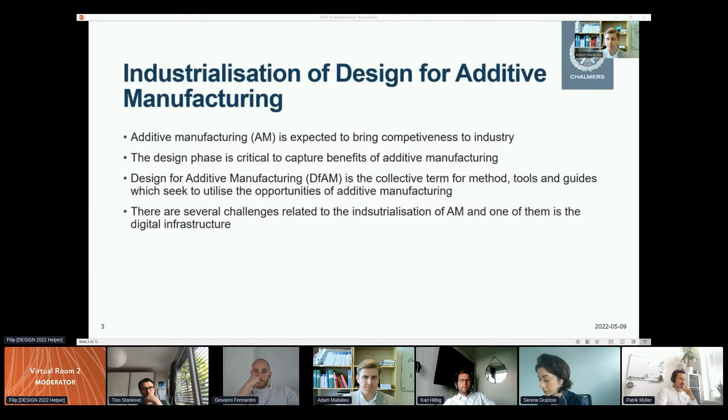The process of DFAM is in particular considered to be digitally intense. For clarification of what is meant by digital infrastructure, we define it as what comprises the information technologies used together to process the vast amount of data that is being generated, transferred, stored, and traced in the AM process steps.

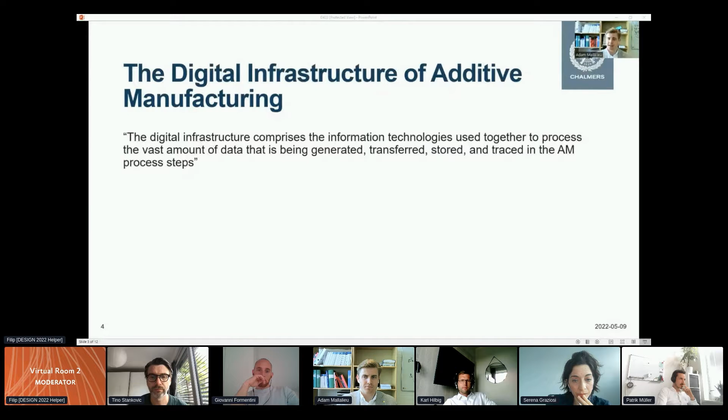The following aim and scope was formulated: to review how DFAM methods and tools consider the digital infrastructure and identify a potential gap in literature, and to explore how the digital infrastructure affects the industrialization of AM. From these, two research questions were formulated.

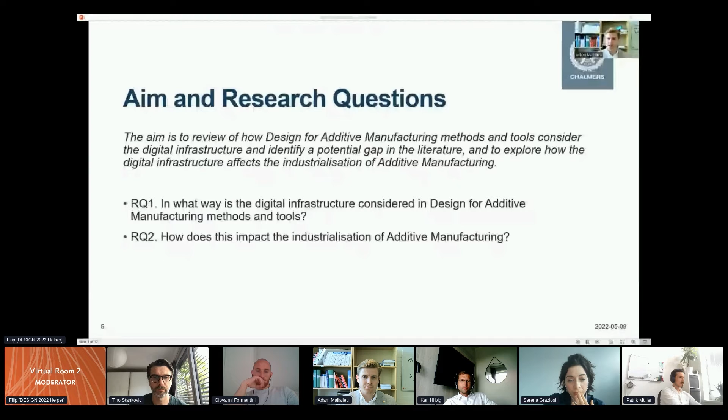First, in what way is the digital infrastructure considered in DFAM methods and tools, along with how does this then impact industrialization of AM?

The study consisted of two parts: a systematic literature review aiming to address RQ1, along with an industrial use case with the intention to address RQ2.

Five categories were used to highlight how the digital infrastructure is considered in the literature.

The first one is data format incompatibility. Methods and tools typically make use of different software, which results in a wide variety of data formats. It can become troublesome if the compatibility between the different formats in the methods and tools is not considered. 12 of the authors either considered the format used in their own specific DFAM method or tool, or problematized it.

The second one is information management. It is interpreted as the activity of managing information, including transferring, storing, tracing, and retrieving information. The implementation of information management in DFAM methods and tools was only considered in 9 of the reviewed articles.

The third one is data analysis, and it relates to the set of activities needed to understand and interpret data. This could also include what is often referred to as cleaning data. The need for cleaning or processing data generated by DFAM methods and tools was seemingly neglected and was only mentioned by 7 authors in the reviewed literature.

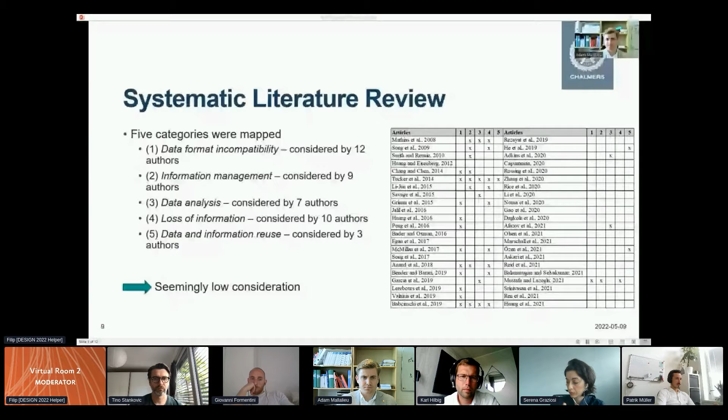Following the systematic literature review, an industrial use case was conducted together with a large OEM of construction equipment. The company seeks to investigate the potential of AM as an option to produce production tools used by operators on the assembly line. AM is particularly considered an interesting option, since these tools are often produced in low volume and customized for operators.

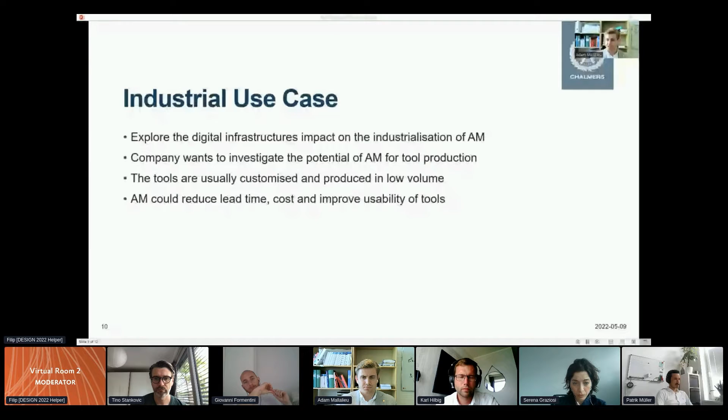AM could then potentially reduce the lead time and cost of these tools. There is also an expectation that AM can increase the usability of the tools if, for example, more ergonomic designs can be produced. The purpose of the industrial use case, in relation to this paper and study, was more to explore how the digital infrastructure can impact the industrialization of AM.

The issue of data format compatibility was observed in the case study. The output format from Fusion 360 is STL, and this format cannot be used to change the geometry in the CAD software. The output of the generated design instead had to be manually implemented on the original CAD file.

Data analysis was needed in the case study, since some of the generated data or information had to be processed before entering the next step. The output from the generated design was not only delivered in a non-compatible format, but it also required manual cleaning to ensure that the proposed design could be printed.

Loss of information was also observed in the case study. The optimized design had to be translated into general guidance for the design. This resulted in information loss, since some aspects of the optimized geometry were not possible to replicate.

There were some identified possibilities for data and information reuse in the case study. An example of this was the produced print data.

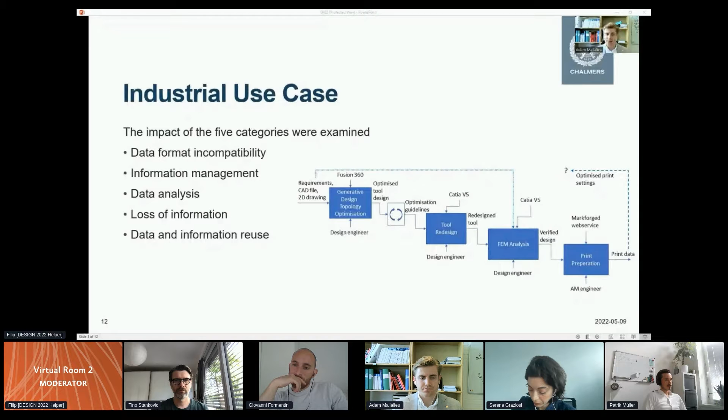Relating back to the aim of this paper, which was to review how the design for additive manufacturing methods and tools consider the digital infrastructure and identify potential gaps in the literature, and to explore how the digital infrastructure affects the industrialization of additive manufacturing. We can conclude that there is a low consideration in the reviewed literature, indicating a gap. In turn, this can have a negative impact on the industrialization of AM as well.

We therefore recommend that there should be more consideration of the issues raised in this paper when developing and validating DFAM methods and tools. We also believe that the digital infrastructure needs to be studied further to strengthen our arguments.

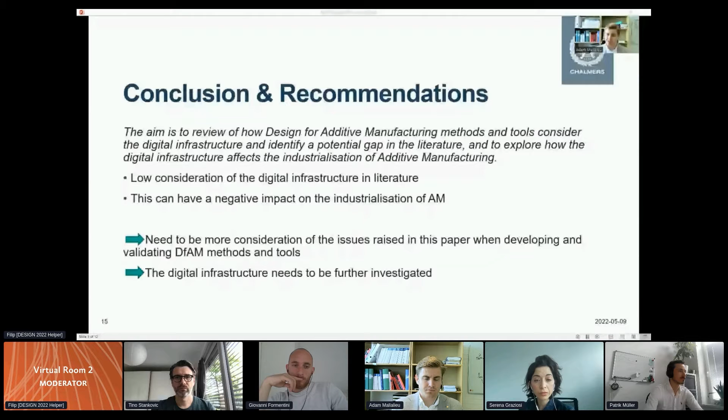Good morning, everybody. I'm Giovanni Formentini, and today I'm going to present our work entitled A Framework to Collect and Reuse Engineering Knowledge in the Context of Design for Additive Manufacturing. During the presentation, we'll see the research context, the state of the art, what we have done, the case study, and conclusions.

The research context in which we're working is the development of additive manufacturing technologies. Additive manufacturing is a fast developing technology, but right now there is a lack of tools to collect knowledge in order to avoid manufacturing issues during the product design. So our goal is to create a framework to collect design actions for design for additive manufacturing technologies, based on ontology, in order to consider and anticipate manufacturing issues during the product design, and also to consider and select the best printing direction according to the requirements.

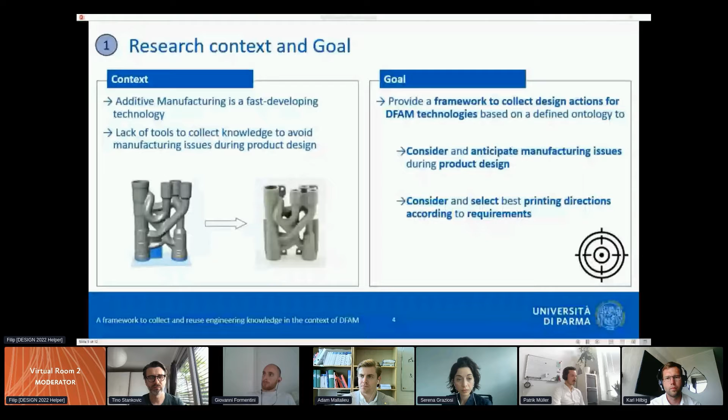Currently, in literature, there are some sources in which it's possible to get information for designing for additive manufacturing. However, this information is limited and not structured. Moreover, the knowledge frameworks developed for other technologies cannot be used for additive manufacturing technologies. Finally, there are some preliminary models to formalize additive manufacturing knowledge, but these models lack manufacturing problem consideration. So what is missing right now is a framework able to collect design actions that can be applied during product development and can anticipate manufacturing problems, considering also the printing directions.

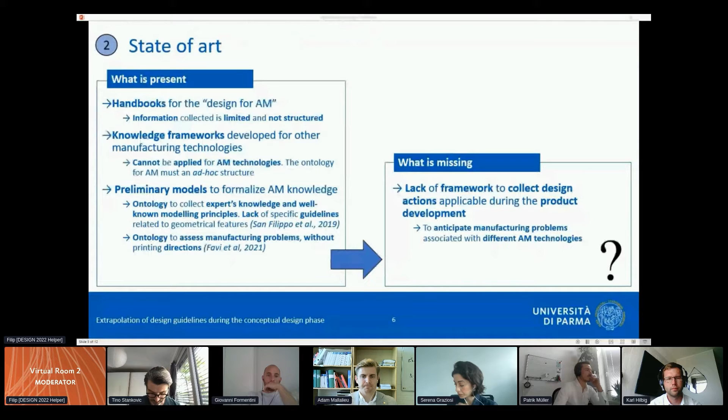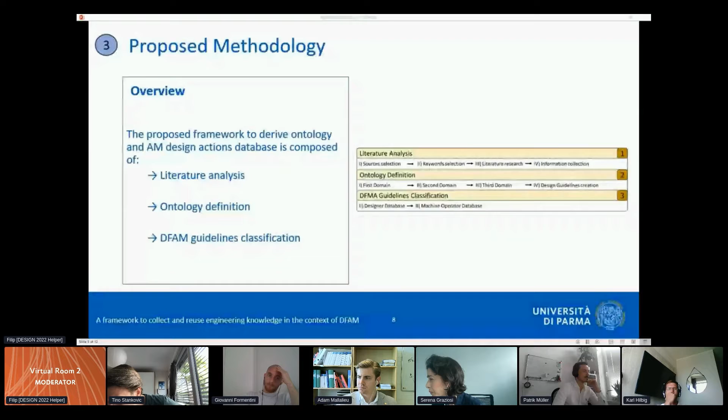The method that we are proposing is composed of 3 steps. The first one is a literature analysis, then there is an ontology definition, and finally the design for additive manufacturing guidelines classification. The first step, the literature analysis, was performed by looking at information inside sources like books, scientific databases, company databases, and so on. The research was performed using a keyword approach, with keywords such as design rules, design limitation, design expertise, and also synonyms. Moreover, to further widen the research, we did brainstorming sessions with experts in the field of additive manufacturing in order to collect their knowledge.

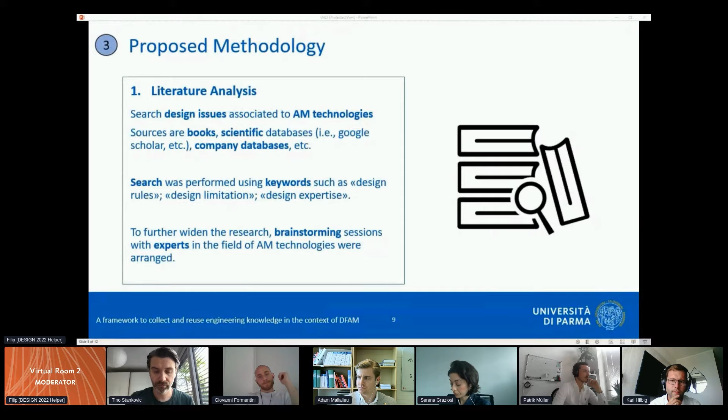The second step is the definition of the ontology. When designing a product that has to be manufactured with additive manufacturing technologies, several parameters must be considered. For instance, the technology that is used, the material, and even the feature that must be created need to be considered by designers in order to anticipate manufacturing problems. Following this, we created an ontology based on 3 domains.

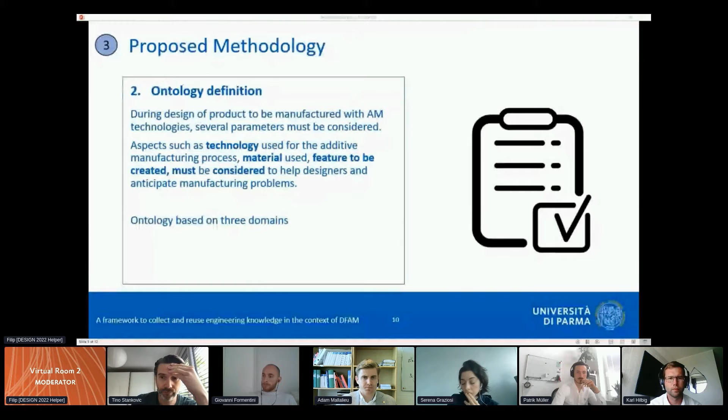The first domain, called domain 1, describes the geometric features such as holes, walls, surfaces, and so on. The second domain, called domain 2, considers the classification of additive manufacturing technologies. This classification has been done based on a funnel of 4 elements. The final domain, domain 3, considers the material that has to be used. In particular, we developed the ontology for materials such as plastics and metals.

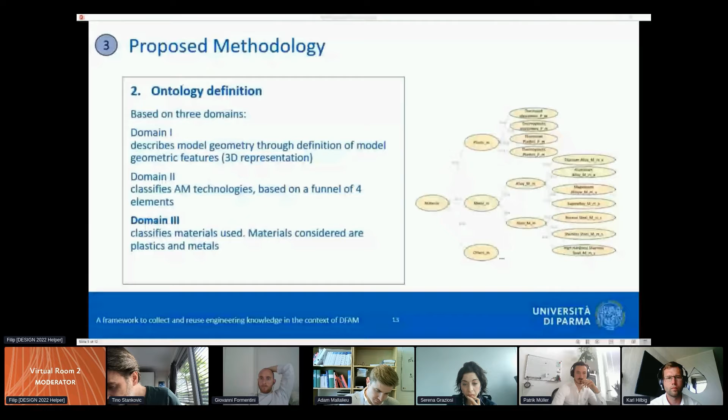The ontology, moreover, defines a clear structure in order to build design guidelines. The structure of a design guideline must follow the form of verb plus noun and also must have a mathematical threshold associated with it. The threshold is used to understand if the design guideline is respected by features or not. We have three different types of errors. The first one is an information error.

It means that the design guideline is not respected, but this won't impact the manufacturing properties of the product. The second one is a warning. It means that the manufacturing process can still be done, but the cost and the time of the process are increased. Finally, we have a critical error, which means that the manufacturing process will fail if the feature isn't fixed.

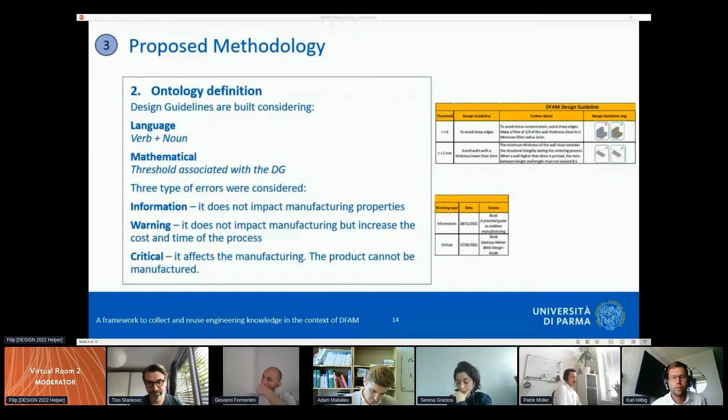The final step is the classification of design guidelines, and during the classification, the design guidelines were clustered into two databases. In particular, one is called Additive Manufacturing Design Database, and it collects design guidelines to be considered during the product design, while the other one is the Additive Manufacturing Machine Operator Database, and it collects design guidelines to be considered during the manufacturing process.

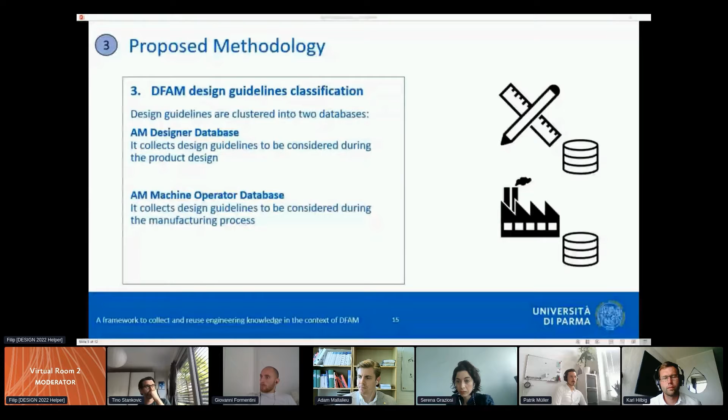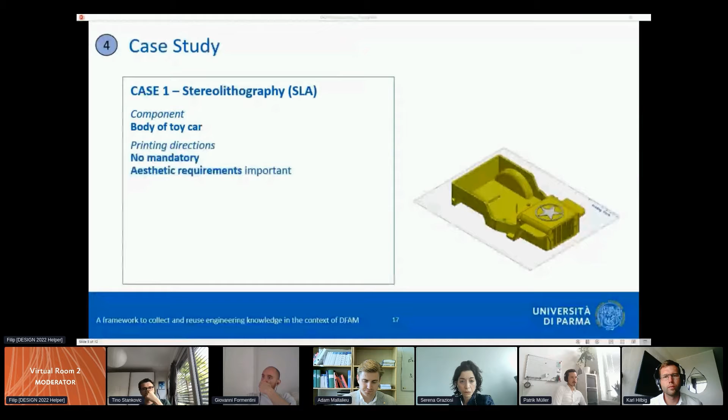The proposed method has been applied to two different case studies. The first one is the stereolithography additive manufacturing technology, and the component which we analyzed was the body of a toy car. In this specific case, the printing directions are not mandatory, and the most important feature to respect is the aesthetic requirements. Using the machine operator database, it was possible to identify the best printing direction in order to maximize the aesthetic requirement. In this case, the printing direction is the one shown on the right hand of the slide.

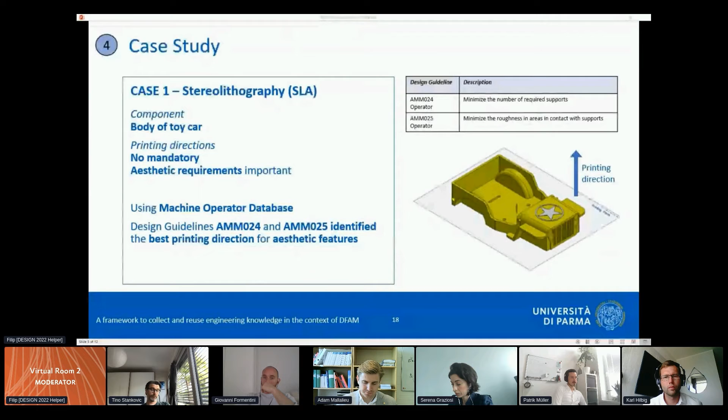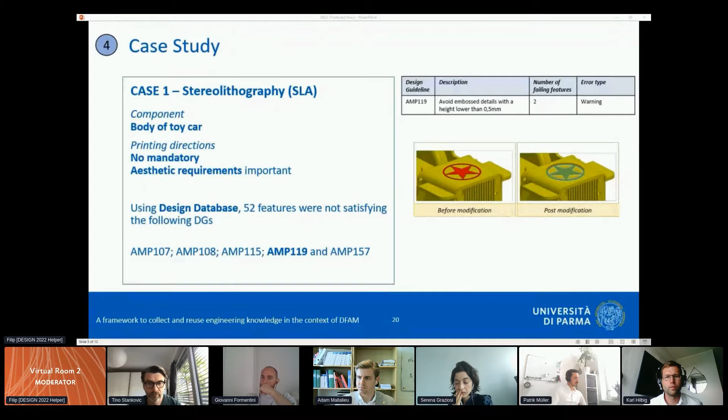Then, using the design database, it was possible to see that 52 features were not satisfying the following design guidelines that you can see on the right side. Due to the time constraint, we're going to show you just one design guideline, which is the AMP 119, which is suggesting to avoid embossed detail with a height lower than 0.5 millimeters. As you can see on the picture, before the modification, the feature was in error. Then we modified that, increasing the height, and everything was fine.

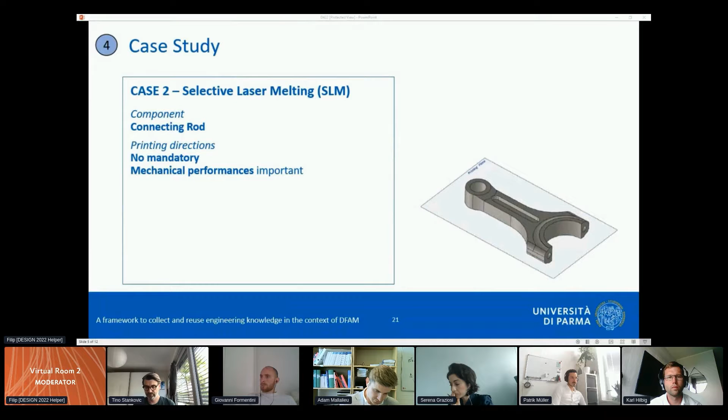The second case study is a connecting rod. In this case, we do not have a mandatory printing direction as well. And the most important characteristics are the mechanical performances. Using the machine operator database, it was possible to identify the best printing direction in order to maximize the mechanical performances. And then, using the design database, it was possible to see that 26 features were not satisfying the following design guidelines, the one that you see here.

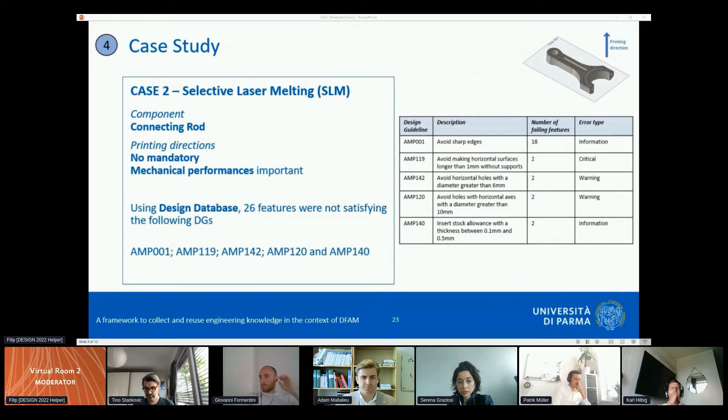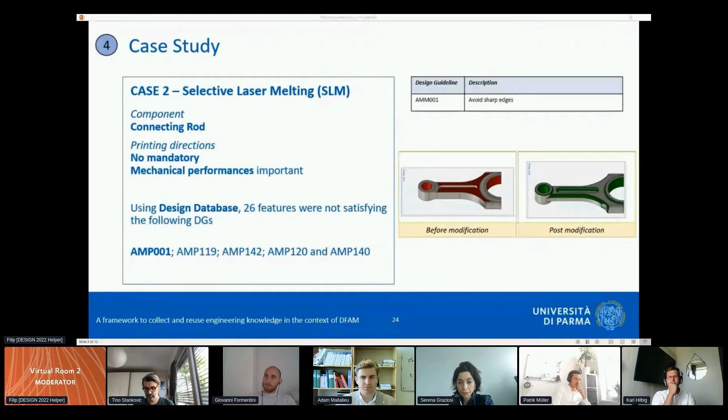For example, the design guideline AMM001 is suggesting to avoid sharp edges. And as you can see on the right side, we have the before modification representation and the post modification representation.

In conclusion, the ontology and the framework that we propose help designers to spot errors during the design process. However, it's difficult to abstract design guidelines and translate them according to the developed ontology. Moreover, additive manufacturing knowledge is still limited and continuously evolving, so there is a need for constant updates. Future development will focus on increasing the database and also on automating the retrieval of CAD features to reduce the analysis time.

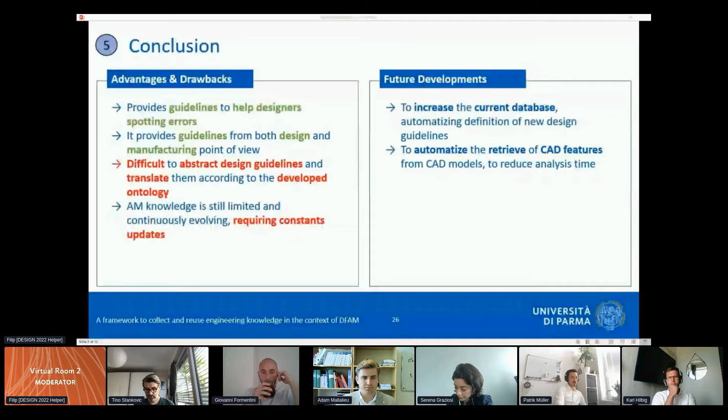Good afternoon. My name is Tino Stanković. I'm a senior scientist at the Engineering Design and Computing Laboratory at ETH Zurich, Switzerland, and I'm going to present our work on computational design of an additively manufactured origami-based hand orthosis. I would like to start off by presenting the motivation for our work.

In recent years, a significant number of new additively manufactured hand orthosis designs have been reported. Those designs, in comparison to the conventional casts, are lightweight, better ventilated, can be easily removed, and don't have excessive pressure points. So there are many advantages. However, there are also disadvantages. They have to be post-processed to remove sharp edges, for example, and to remove the support structures.

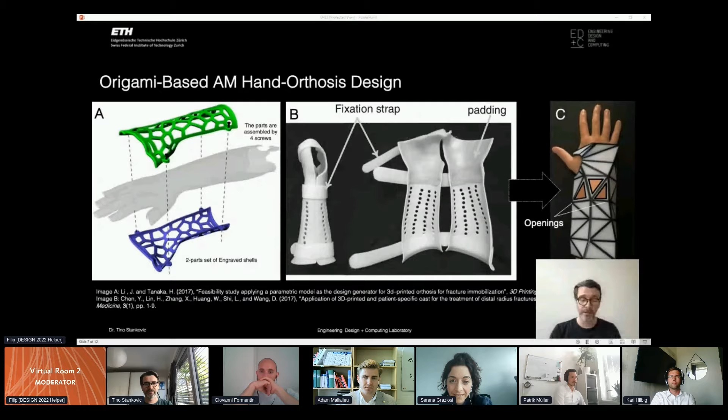And our motivation comes from these drawbacks, in which we try to design an origami-based hand orthosis that can be produced flat and then folded to a person's arm. The openings can be easily added, and some other features of origami patterns that I'm going to discuss in future slides can be beneficial to realize such a design.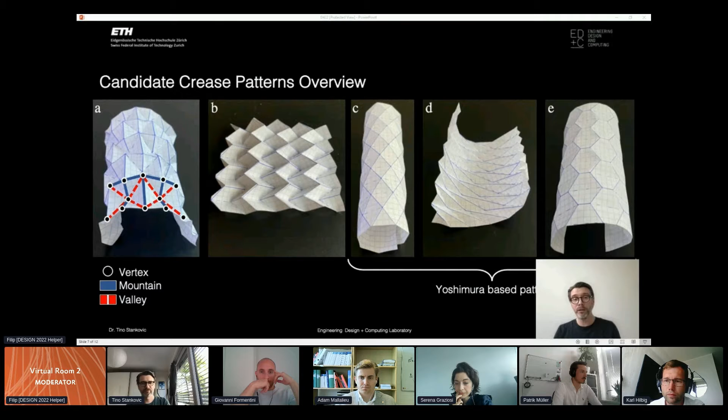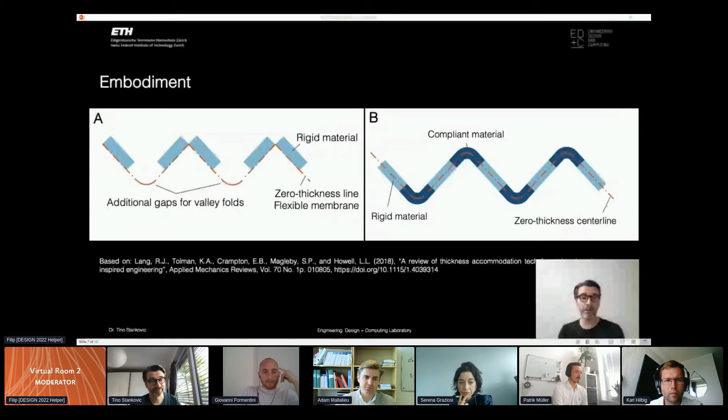So we go for more degrees of freedom, which will allow us to explore the design space more. With respect to the embodiment, we decided between 2 different strategies. A shows a strategy in which rigid material is connected by a flexible membrane, whereas B shows rigid material being connected by compliant or flexible material. B is beneficial for our case because A introduced a reduction in stiffness due to the gaps between the rigid material. So we decided to embody our design using B.

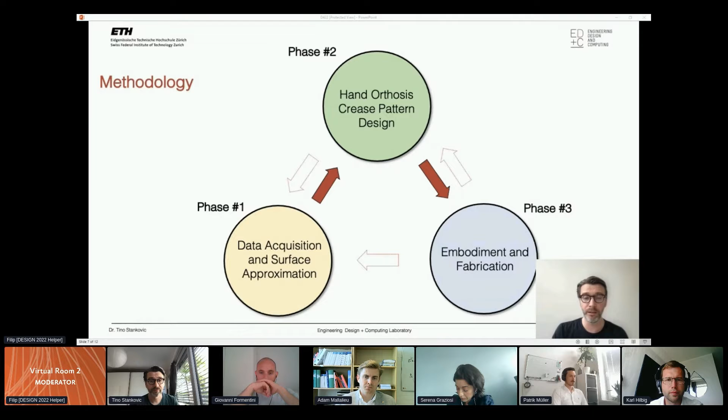The methodology that we developed for our work involves 3 phases: data acquisition and surface approximation, hand orthosis crease pattern design, and embodiment and fabrication. Of course, since we needed to set the parameter settings and find the design heuristics, we iterated between the phases and not only discovered designs, but also tried to pinpoint design parameters and relevant design heuristics required to produce such designs. Let's describe the phases in brief.

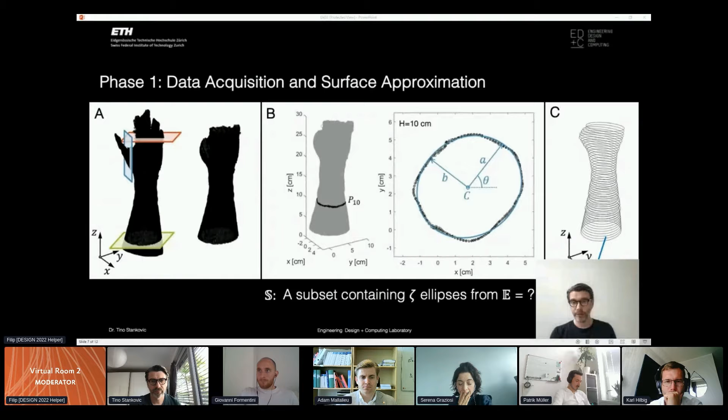Phase 1, the data acquisition and surface approximation. First, in A, we cut off parts of the scanned point cloud that are not of interest to us, and B shows what happens with the remainder. At each elevation, we approximate the point cloud with an ellipse, which is effectively a surface approximation, in terms of C, theta, A, and B. The question is, out of those 45 ellipses that we have in C, and effectively in set E, which of those ellipses should I select when I design a Yoshimura pattern for each basis? I can't use all of them.

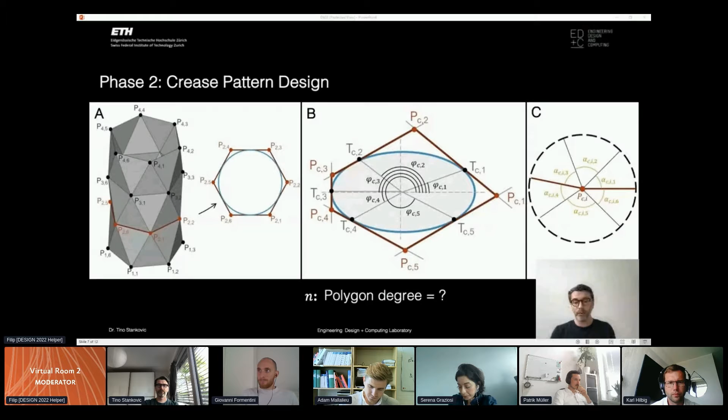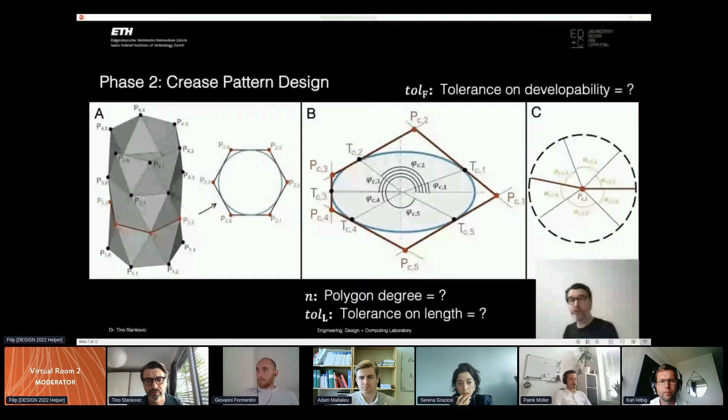The question, of course, is which is the appropriate polygon degree to produce feasible designs, what is the tolerance of length, so how short should the faces be, and also the tolerance of developability. The condition for developability, or in this particular case almost flat foldability of the crease pattern, is that the summation of the sector angles for each internal vertex is 360 degrees. This is also included in the optimization.

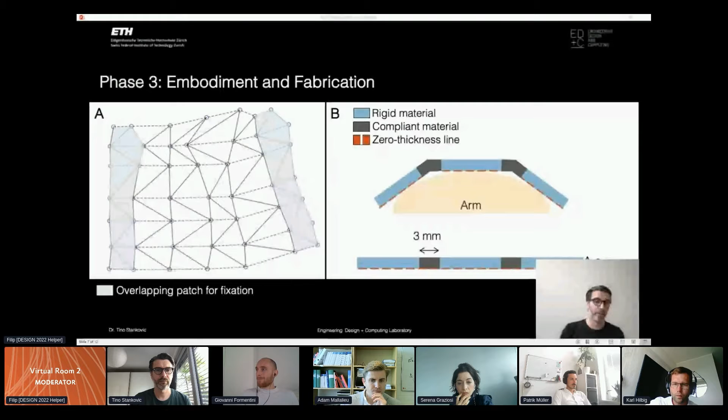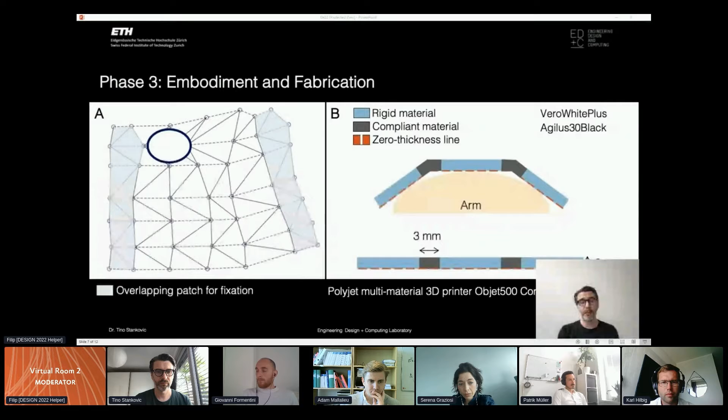In the embodiment stage, we have first the addition of the overlapping patch for fixation, shown in blue in figure A, post-processing for the hole for the finger, and finally, we manufacture using a PolyJet multi-material 3D printer, Objet500 Connex, so that the zero thickness line is in contact with the arm. For the rigid material we use VeroWhitePlus, whereas the compliant material is Agilus30 Black.

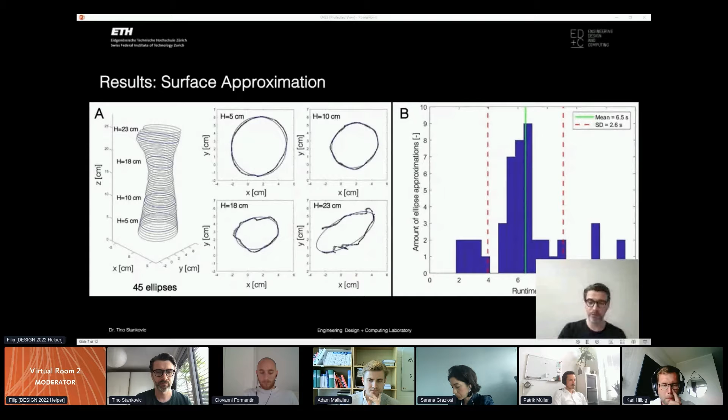Results for the surface approximation are actually very good. Image A shows 4 different ellipses at different heights, and B shows the mean runtime of 6.5 seconds. So this is not really a problem to solve using optimization. The design space is actually a bit more complex. We tested different parameter settings ranging from 5 to 7 polygon degrees, 5, 6, or 7, and different numbers of ellipses involved, ranging from 5 to 8.

In total, we exhaustively enumerated 36,876 designs with a mean runtime of 35 seconds. Empirically, using testing, we decided to filter the design space and decided the mean violation of developability and mean violation of length boundary should be 1 and 0.5 respectively.

This gives us image B with in total 632 designs, out of which 489 designs with 5 cuts produce different types of artifacts like spikes or twists. We ruled them out, and the remaining 143 designs with 6 and 7 cuts were manually filtered. In the end, this led us to select the design shown in inset D1.

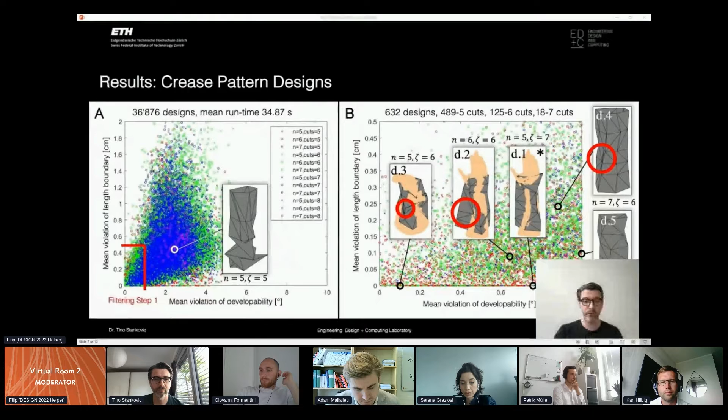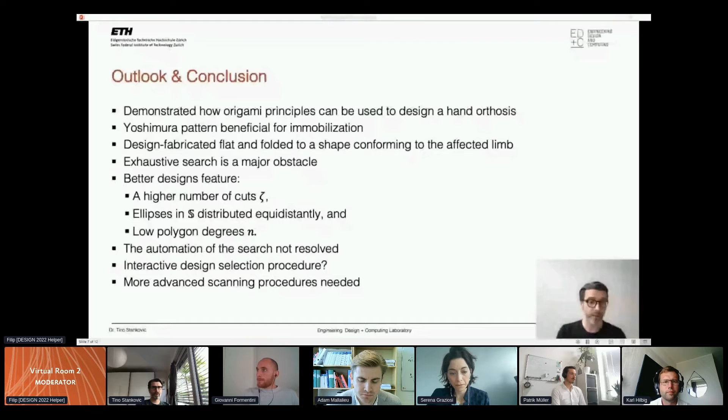To sum up and conclude, we demonstrated how origami principles can be used to design hand orthoses. We showed the benefits of the Yoshimura pattern. We showed the computational process, how to do it. Of course, the exhaustive search is an obstacle and requires more work and automation, or even an interactive design selection procedure. We also showed that the better designs, in our case, at the moment feature a high number of cuts, ellipses distributed equidistantly, and low polygon degree numbers.

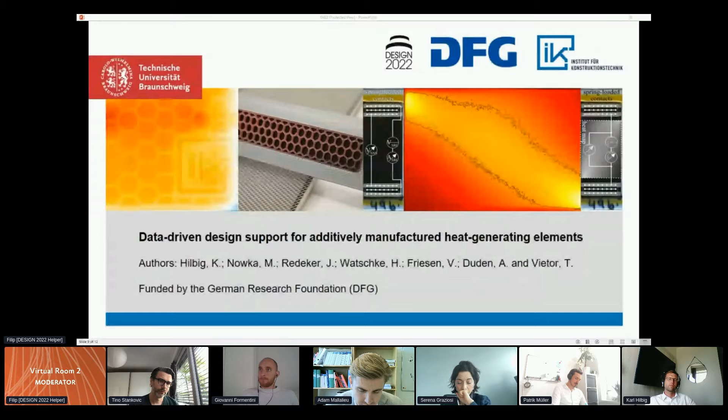My name is Karl Hilbig. I'm a research associate at the Institute for Engineering Design of the Technische Universität Braunschweig. In the following presentation, I would like to give you an insight into the conference paper, Data-Driven Design Support for Additively Manufactured Heat-Generating Elements.

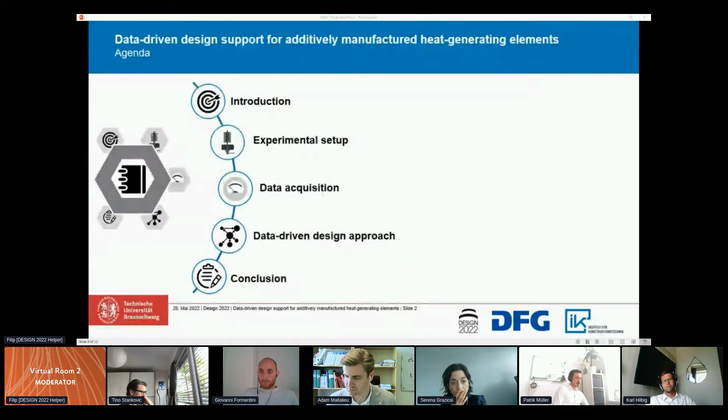The agenda of this presentation is linked to the method of the paper itself. In the introduction, I will give you a motivation and possible areas of application for these functional structures. The experimental setup contains the design of experiment, the specimen design, and the applied measuring method. To use the experimental data for product engineering, a software tool was developed. The tool uses a data-driven design approach to compare possible process parameters with their heat distribution. The workflow and modules will be explained, and the presentation will sum up the work carried out and give upcoming research fields.

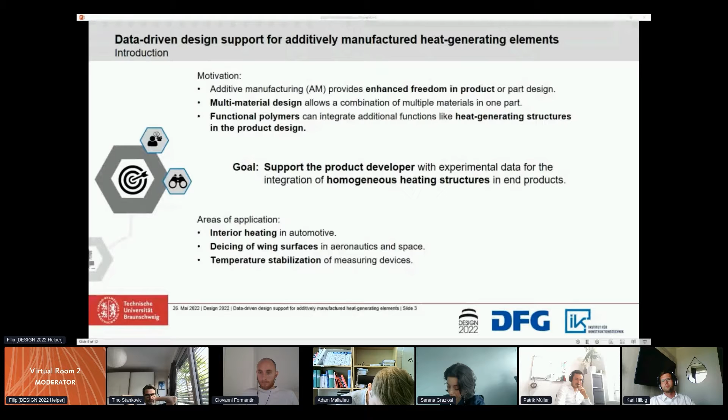The research motivation of this investigation is based on the freedom in product or part design enabled by additive manufacturing. Especially the multi-material design of additive manufacturing allows a combination of multiple materials in one part. Functional polymers can integrate additional functions, like heat-generating structures, into the product design. The goal of this research was to support the product developer with experimental data for the integration of homogeneous heating structures in the end product. Possible areas of application can be seen in interior heating, de-icing of wing surfaces, or temperature stabilization of measuring devices.

In the following slide, I will present the design of the specimens. All specimens were manufactured with the process material extrusion using the printer Toolchanger from E3D. The characterized material was a filament, BlackMagic3d PLA-Conductive, which has electrically conductive properties. For the design of experiment, a D-optimal design space with a quadratic trial function and 2 input factors was used. The input factors were the printing temperature and the raster angle of the part orientation.

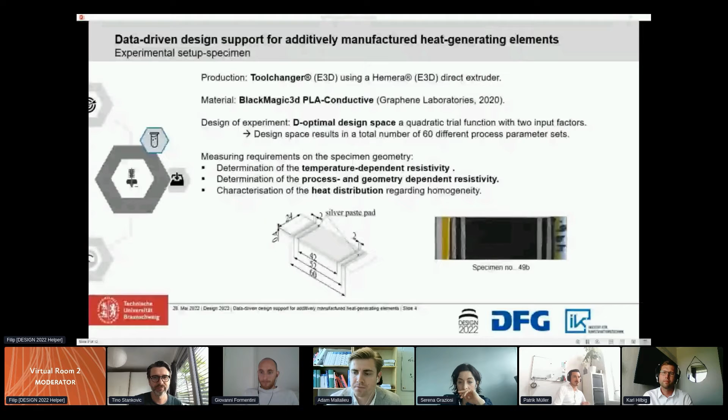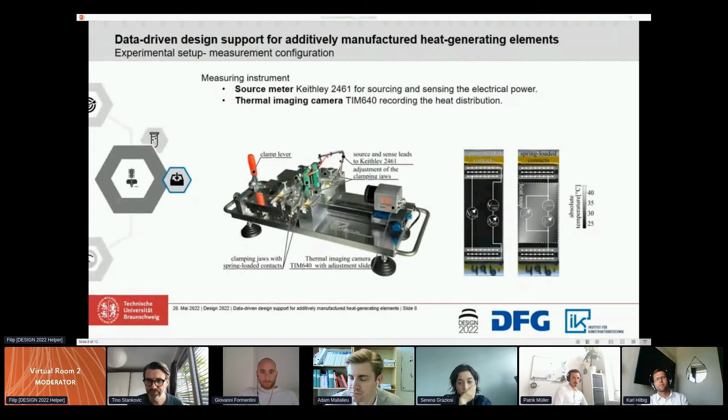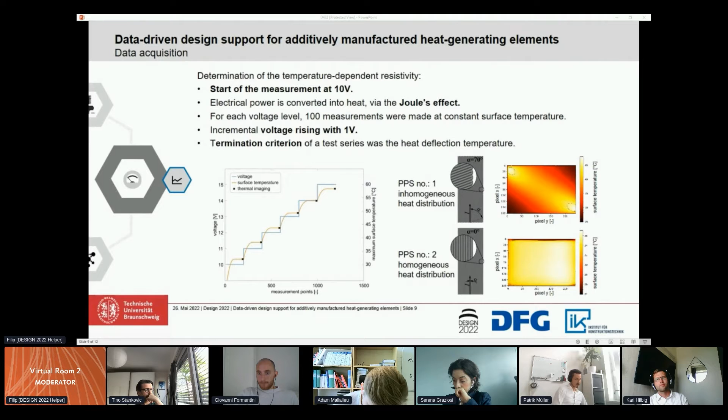To enable the use of the experimental data in the product development process, I will now present the workflow of the support tool. The architecture of the data-driven design support tool is based on 2 core modules. The first is a surrogate module, where the experimental data is transferred to a regression model. The defined input factors correspond to the parameters of the design of experiment, the voltage level, and the heat distribution of the experiment.

The implemented method allows an inverse parameter identification for the process parameters. By this, we are able to predict process parameter sets that lead to selected electrical properties and thermal distribution of heating panels. The second module is the classification module.

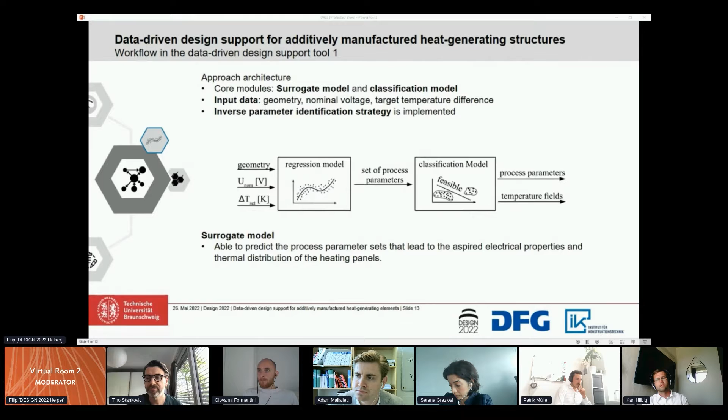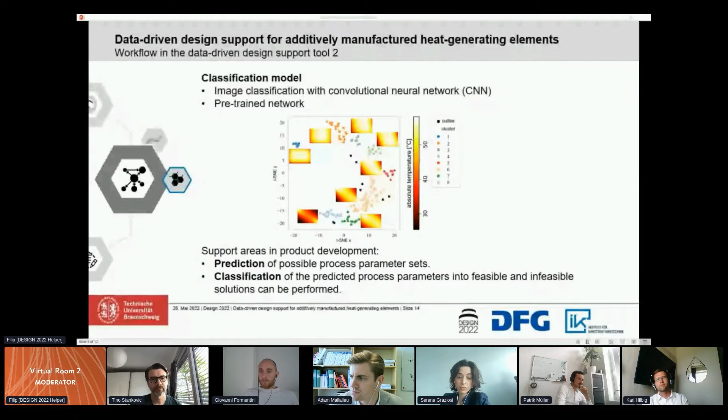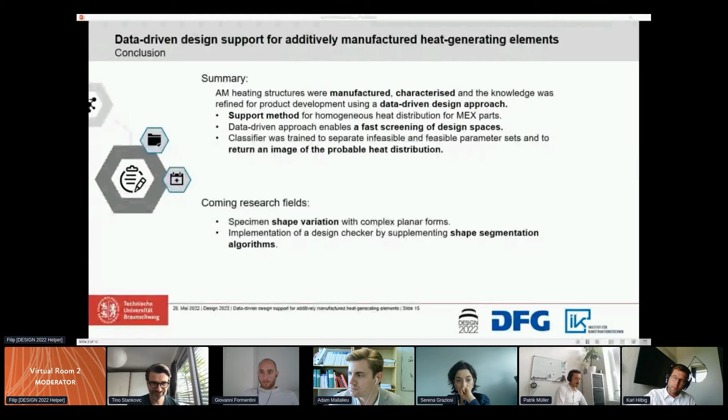In conclusion of this research, we additively manufactured heating structures, characterized them, and used the resulting knowledge for product development via a data-driven design approach. This enables fast screening of the design space for future product development, and for future process parameter sets, the temperature distribution can be predicted.

The upcoming research fields can be divided into 2 areas. The first is shape variation, where we would like to change the geometry first to complex planar forms and then to 3-dimensional surfaces. The second field will be the integration of a design checker by extending the tool with a shape segmentation algorithm.

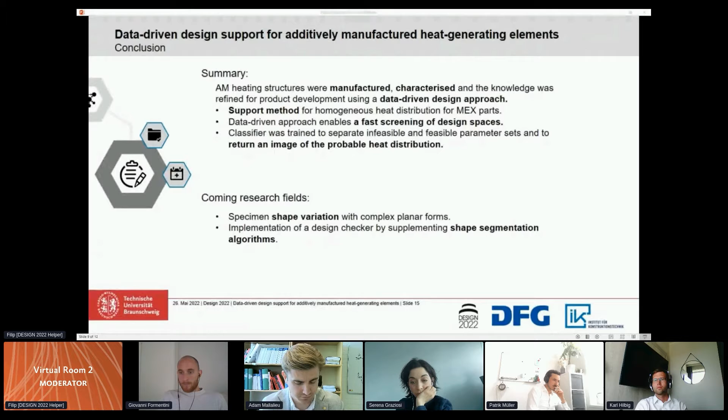I hope that I could give you an insight into our publication and that I could interest you in this research topic. Thank you for your attention.

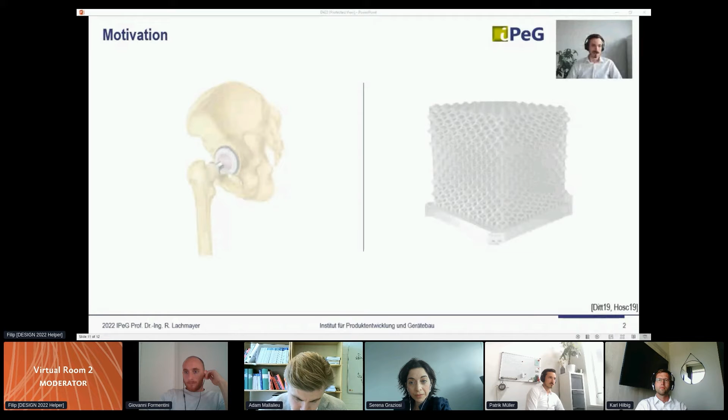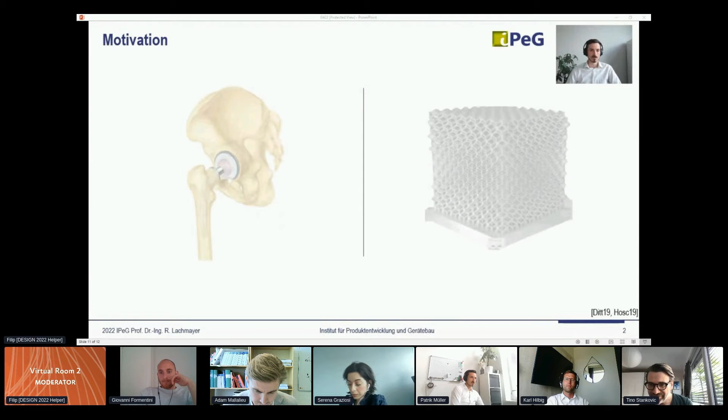To begin, I would like to briefly introduce the two domains in which we are located here. On the one hand, there's arthroplasty, which is experiencing considerable growth in Europe, also due to demographic change. Approximately 450,000 people in Germany needed an artificial joint replacement in 2020, mainly knees and hips. But all other endoprosthesis implantations are also growing steadily because people are getting older and more demanding with regard to their environment and themselves.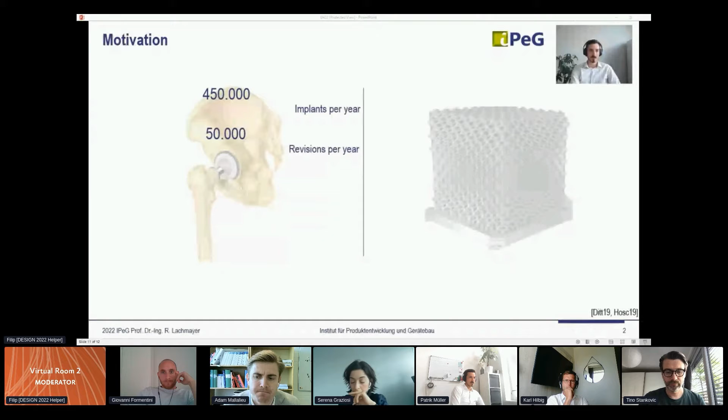Of this 450,000, a total of 50,000 are revisions. And it is shown that the numbers of revisions are highly increasing.

One of the main reasons for revision is aseptic loosening due to stress shielding. In stress shielding, due to the significantly higher elastic modulus of the implant material compared to the bone, there is a shielding of the mechanical loads in the bone, which leads to increased bone resorption and reduction of bone density.

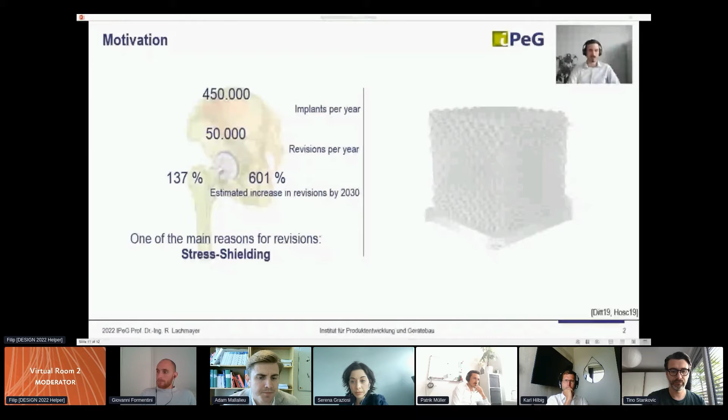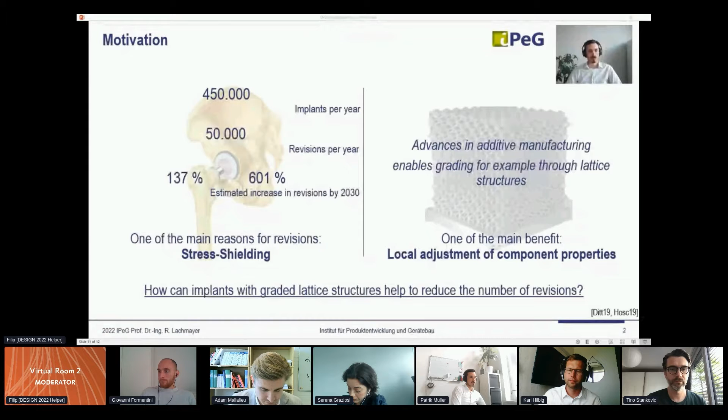With exactly this problem, we now open the second domain of this work, additive manufacturing. Advances in additive manufacturing enable grading, for example, through lattice structures. This leads to one of the main advantages used in this work, the local adjustment of component properties. If we now bring both areas together, we can specify the main question of this work mentioned at the beginning: how can implants with graded lattice structures help to reduce the number of revisions?

To be able to answer the question, we need to take another look at the effect of stress shielding and understand what impact the implant actually has on the bone from a mechanical point of view. All of the following slides refer to the example of hip endoprosthesis, but are analogously transferable to all other osseointegrative implants, such as knee, shoulder, or even exoprosthesis.

A numerical static simulation of everyday movements shows in the upper part of the image a relatively homogeneous stress distribution in the entire medial region of the femur in the preoperative state. After a conventionally manufactured implant has been virtually implanted, shown in the lower part of the image, and the same movement has been simulated, a clear decrease of these stresses in the mentioned red area, shown by the blue coloring, can be seen. This shielding is the so-called stress shielding effect.

The aim of the optimization, the topology of the implant, should therefore be to maintain the stresses in this area of the bone, or to make them as great as they were before the operation.

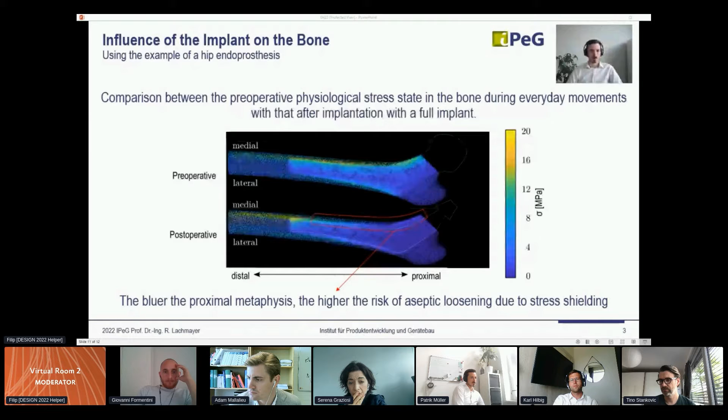Our approach attempts to map precisely this undertaking. A method for density-based topology optimization for a defined external state of stress in individualized endoprosthesis requires two models. The first is a preoperative model of the femur alone, the so-called target state, on which information about the physiological stress state in the bone is numerically recorded and stored.

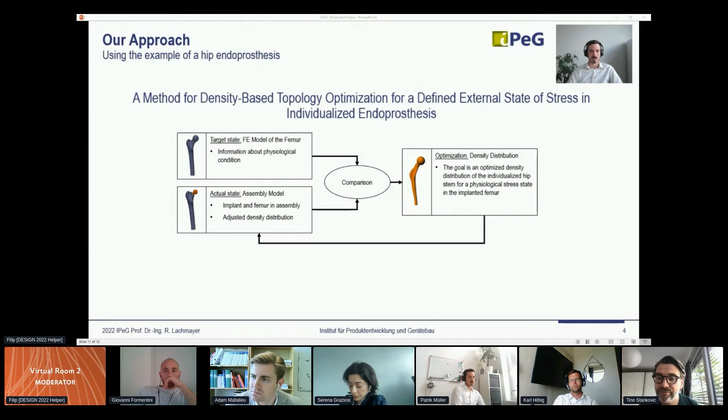The postoperative stress state with a full implant is recorded in the same way and compared with the target state. Now, the density field of the implant is optimized until the actual state corresponds maximally with the target state. For this reason, we also call this a method for creating osseointegrative implants that are not noticed by the surrounding bone from a mechanical point of view.

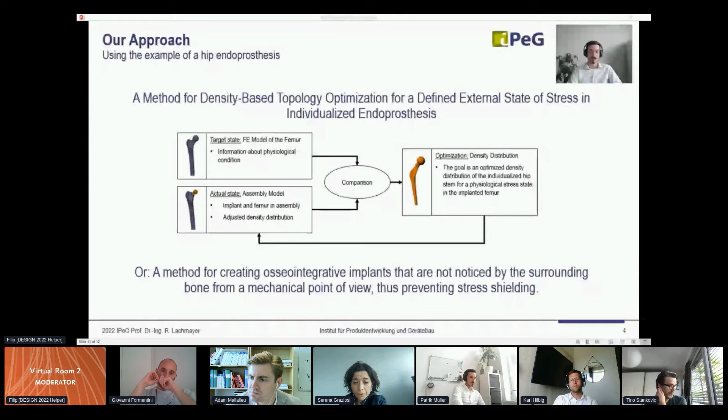The base is the individualized implant. This implant is divided into two parts: a boundary layer, which is constantly graded, and the inner part, which is optimized. To achieve constant pore size at the outside for maximum bone ingrowth, the marginal density was set to 40% at the outside.

The inner region was homogenized using the Ashby-Gibson model, which establishes the relationship between the elastic modulus, density, and the respective lattice cell. The fact that the optimization leads to new, better stress distributions in the bone is shown here.

Here are the stress differences between before and after the operation for each volume element. As a reminder, the closer this difference is to zero, the better the result, and the more the stresses after surgery correspond to the physiological stress state before surgery. This procedure reduced the stress difference globally by 42%.

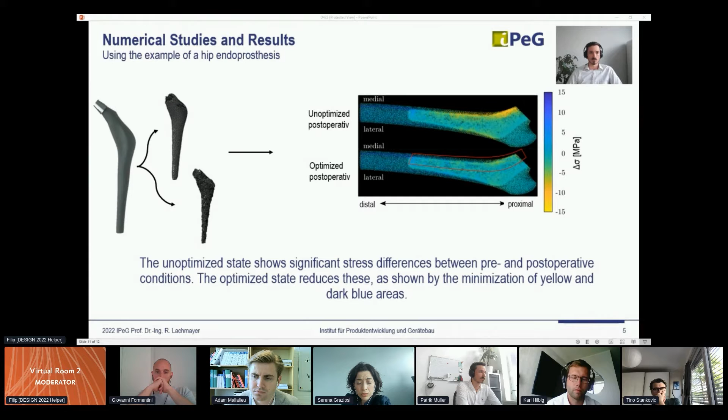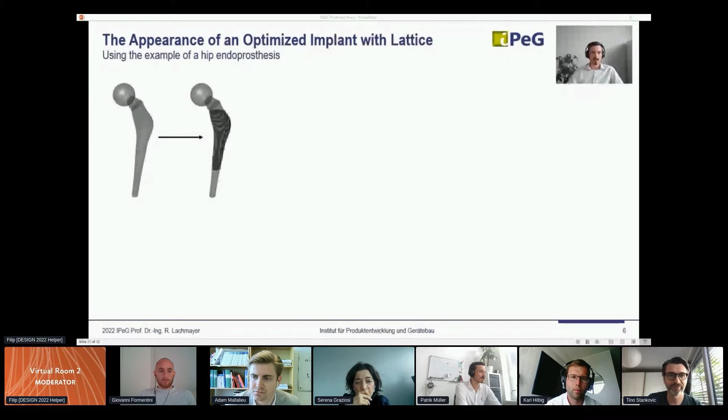Now we have an optimized density field, but not yet a ready-made implant. Only in this step, by using graded lattice structures, does a manufactured implant emerge from the optimization. To recreate this, the original geometry of the implant again serves as input. This volume is voxelized and filled with small cubes. In each of these cubes, a unit cell with optimized density will be placed later.

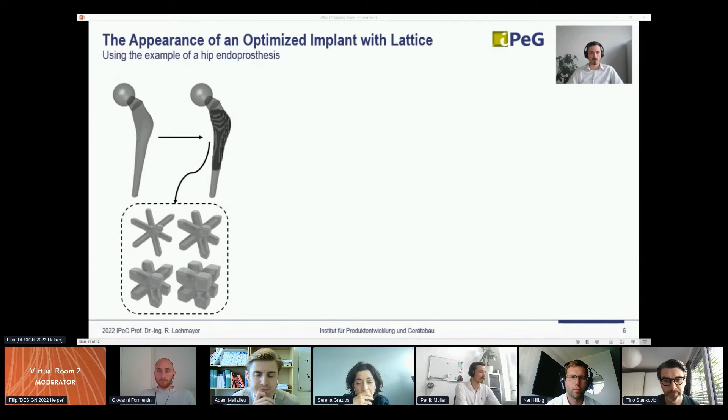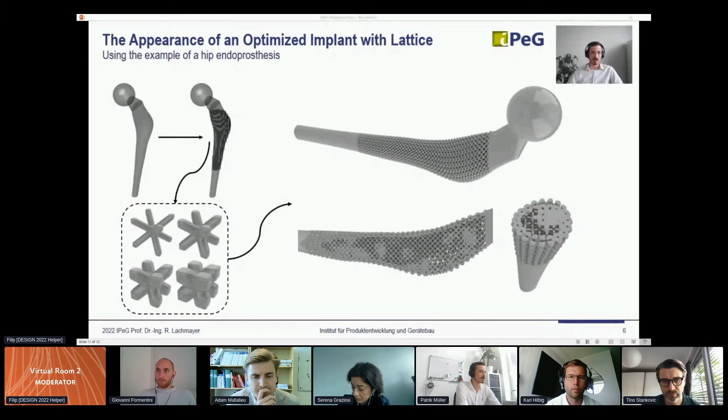Body-centered lattice structures are used because they can be printed without manufacturing restrictions and are easily customizable due to the struts. Here is the grading of the optimization just shown for an individual implant. It can also be seen here that the optimization tends to produce small islands of material.

At this point I come to the summary and the outlook. In the last few minutes, I have presented a method for determining an optimized density topology for endoprostheses using lattice structures for all bone-anchored implants. The numerical investigation shows considerable potential of this approach, especially since the topology optimization results are manufacturable and implantable by coupling with additive manufacturing. Therefore, the next steps should definitely address experimental validation, which is relevant to underscore the positive outcomes of this method.

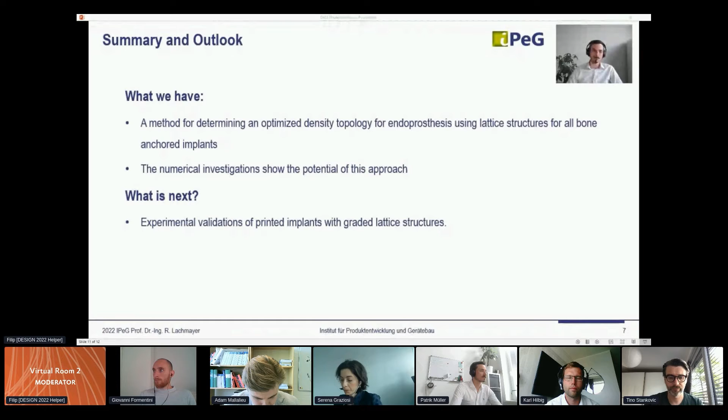With that, I would like to thank you for your attention, wish you good health, and look forward to your questions.

Okay, here we are. Thank you very much for the very nice and very clear presentation. I think all of us enjoyed it. So now it's time for questions. I've seen that the other presenters were quite active in asking questions, which is really good. It seems there are clear commonalities among the papers. But also our moderator has asked questions. So my invitation is to unmute yourself and ask a question directly. We want to see you, Filip.

Okay, thank you, Serena. So first of all, thanks for all the wonderful presentations. The first question is for Adam regarding your loss of information. I'm interested, did you find in your literature review or somewhere else what are the most common types of information lost during this process? Can you give me an example of what is a critical information loss that we should really avoid? And I have one more question for you as well. I saw later in the presentation that you use both Fusion 360 and CATIA V5 in your case study. Why switch software? Shouldn't it be better to just stick with Fusion 360?